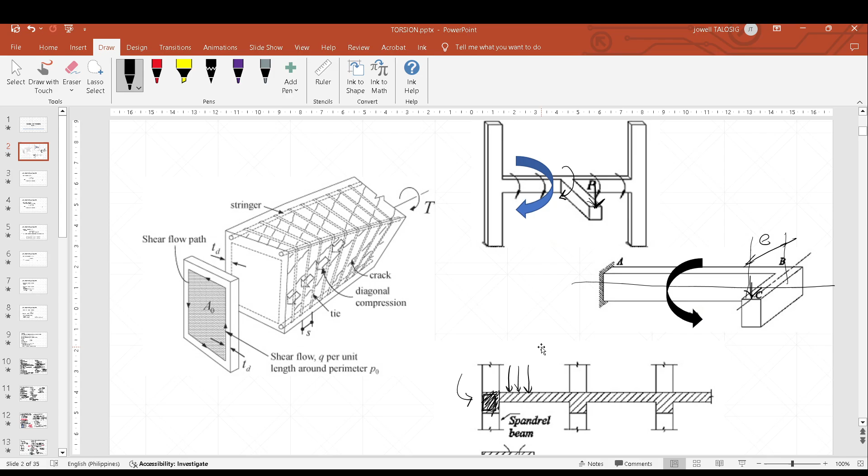Okay, and then meron din tayo dito, we have here this spandrel beam na nasa exterior side, nasa labas. Because of this position, nasa labas siya, then the load is in here, mga live load, dead load natin, nandito siya, applied on the slab. And if we're going to consider this beam, meron siyang load na nandito, which is eccentric to this beam, no? Yung exterior beam natin. Nagkakaroon po tayo ng moment pa rin, torsional, right?

So gaya ng sabi ko kanina, hindi sa lahat ng pagkakataon, not always merong torsional moment. Okay, not always. We need to check first if we need to design our beam to resist torsion. So paano ba tayo mag-design?

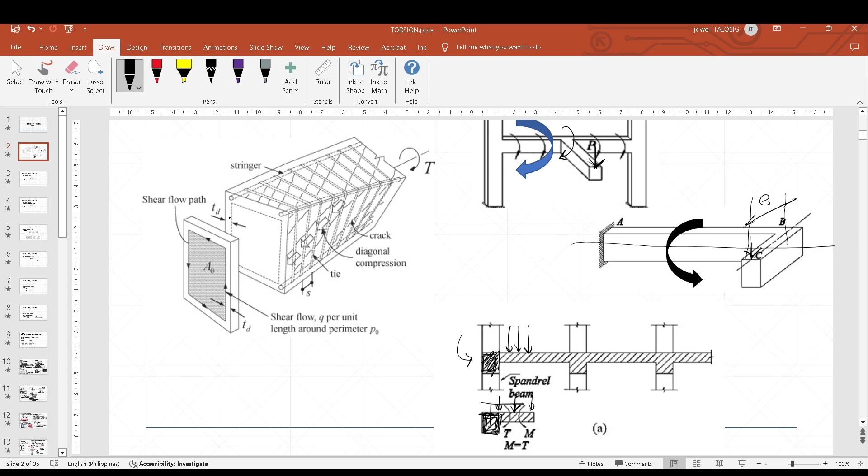So first we need to tackle the code requirements. Meron tayong dito ang tinatawag na cracking torsion. Which means, if your applied torsion, yung naka-apply mismo due to the loadings sa ating beam, sasabi dito na magka-crack yung ating concrete if the torsion on that beam is equal to this value here. So this is the cracking torsion, or T sub CR, that is equal to 1/3 lambda times square root of F prime C, quantity ACP squared, all over PCP. So this is the cracking torsion.

Ngayon, let's discuss what is ACP and PCP. Of course, lambda, alam natin na, that's the modification factor as discussed dun sa mga naunang topic natin. And then F prime C, of course, that is the compressive strength of our concrete. Then ACP is the area enclosed by the outside perimeter of the concrete cross section. So if we have here the beam, ACP is the whole area of our beam. That is the ACP. And PCP is the perimeter of your beam.

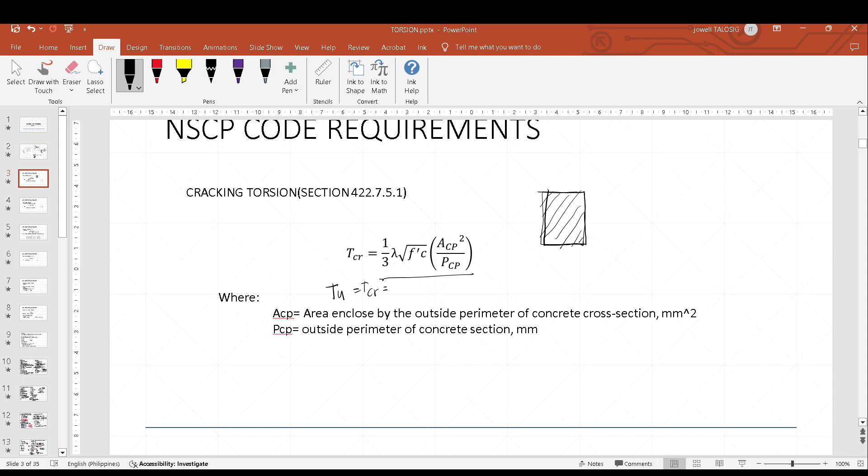Right? So ibig sabihin ba nun, pagka yung TU natin is equal to TCR, doon lang tayo mag-start ng design. Okay, so meron tayong tinatawag na torsional strength, yung threshold torsion. So torsional moments can be neglected if our applied moment, our TU, is less than our phi T sub TH, or the threshold torsion. So ang threshold torsion na to is basically ang 1/4 of our TCR times yung ating modification factor, or the phi.

Okay, so phi 1/4 TCR. Ito po yung ating threshold torsion.

Okay, so we have TTH, T sub TH is equal to 1 all over 12 lambda times square root of F prime C, the quantity ACP squared all over PCP. Okay, kung matatandaan nyo yung kanina, yung cracking, that's 1/3. Dito, 1/4 ng TCR, dun po siya nakuha.

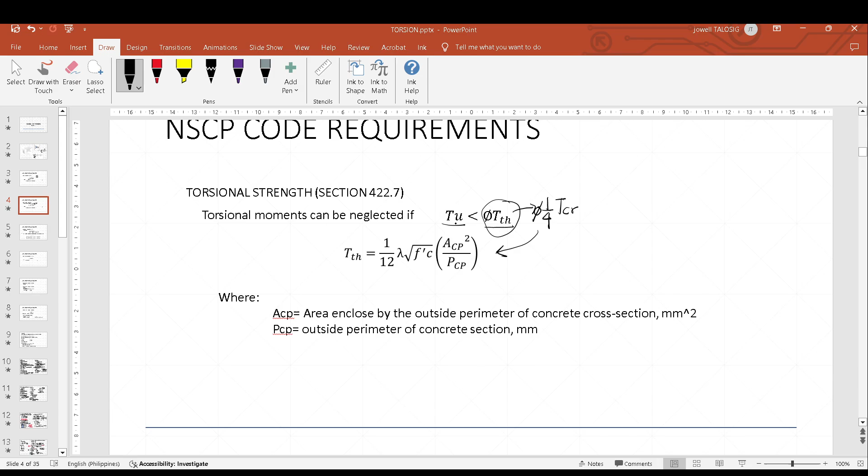Ibig sabihin, we need to design our beam for torsion when our TU is greater than or equal to 1/4 of our cracking torsion. Hindi po natin pinapaabot sa ating cracking torsion, no? Sabihin, 1/4 pa lang nun, kailangan mo nang i-design yung beam to resist torsion. So again, we need to design our beam to resist torsion when our TU, applied torsion, is greater than our phi threshold torsion, T sub TH.

Okay, so next is meron tayong tinatawag na cross-sectional limit, same dun sa ating shear. Meron tayong cross-sectional limit, so for us to check, no class, na that our beam size or dimension is adequate enough to hold or to resist our torsion, okay, we need to check, or we need to satisfy this equation.

Okay, here for solid section, sa ating NSCP, sa section 422.7.7, okay, meron din tayong for hollow section, but for this topic we mainly focus on the solid section. This is the equation we need to satisfy. If our left part of the equation is less than or equal to the right part, meaning our beam is adequate to be designed for torsion. Pag hindi po, pag greater yung left side sa ating right side, we need to increase our dimension.

Okay, so let's define, no, the equation. So we have here for the left portion, so you need to memorize this one, which is the square root of the quantity VU over BWD squared. This is basically because of our shear. So combine na to, combine to ng shear saka torsion.

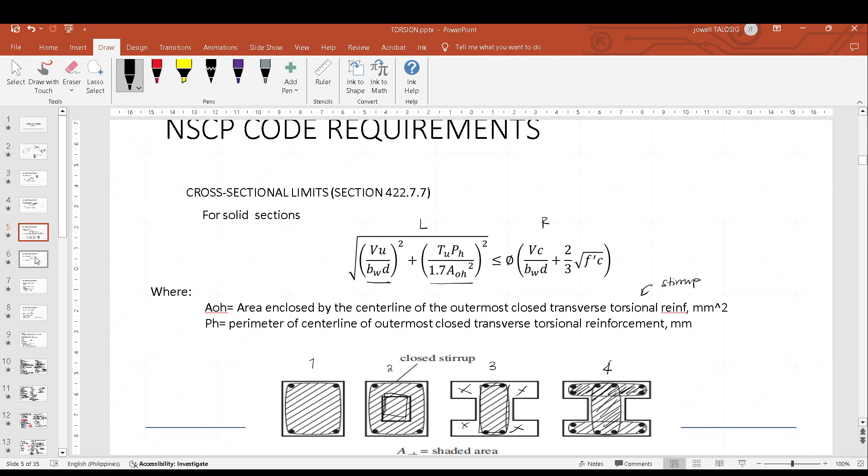Okay, so next is the nominal torsion moment. It's based on our section 422.7.5.1 ng NSCP. So we have here the formula Tn, the torsional moment, nominal torsional moment, which is equal to 2AO AT FYT all over S cotangent theta. So AO, it has a formula of 0.85 AOH.

Okay, so AO is 0.85 AOH. And AT here is the area of one leg of closed stirrup resisting torsion, basically it is the area of your stirrup. Yun yung ating AT, right? So that is for the nominal torsion moment. And of course, S here is the spacing of our stirrup.

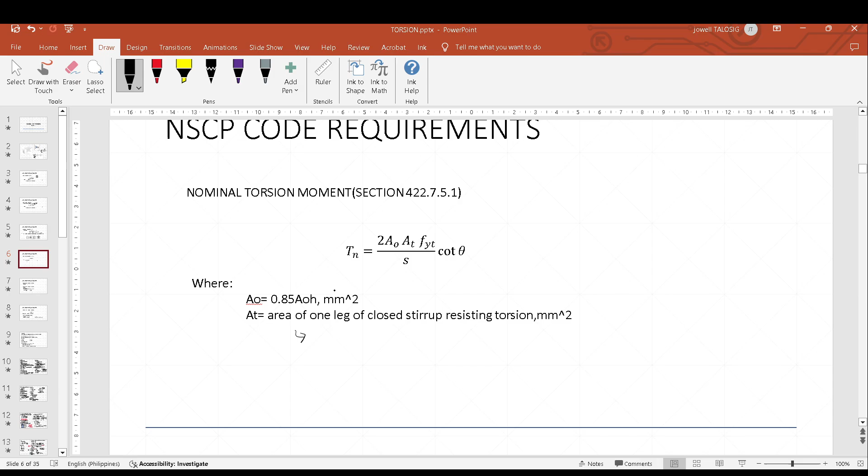Okay, so next is the maximum spacing of transverse reinforcement. Based on our NSCP Section 409.7.6.3.3, we have pH or the perimeter divided by 8, or 300 mm, whichever is the smaller value. That's our maximum spacing.

For the minimum spacing, the formula is AV over S, which is the area of the transverse reinforcement all over S. So we have 0.062 square root of F prime C, BW over FYT, where FYT is the yield strength of your transverse reinforcement. Or we have 0.35 BW all over FYT. Take note of these values, the maximum and minimum spacing of your transverse reinforcement.

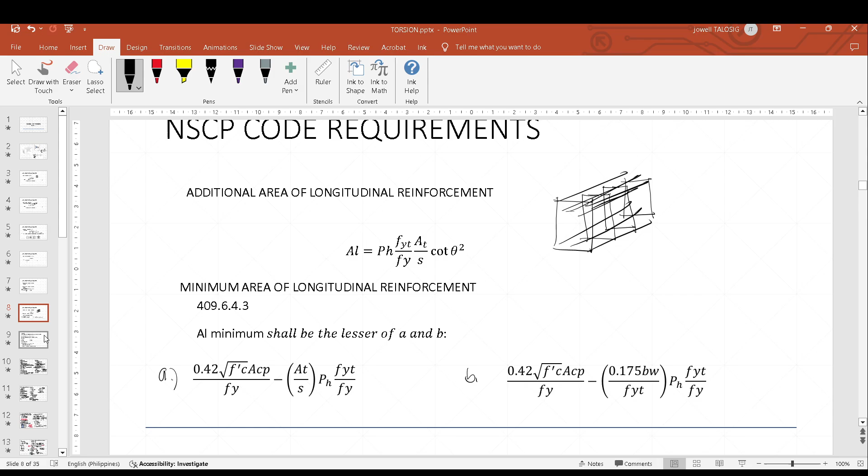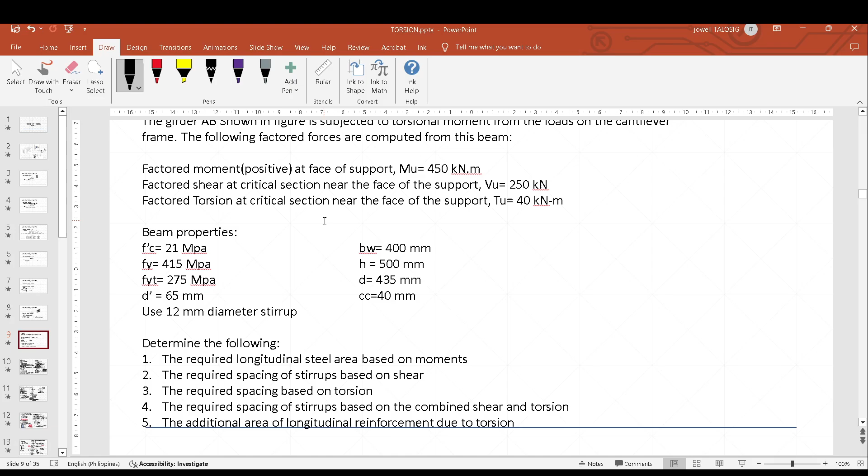So let's use the formulas discussed earlier in practice. Here's the example: The girder AB shown in the figure is subjected to torsional moment from the loads on the cantilever frame. The following factored forces are computed.

These are our given forces. We have the factored moment MU, 450 kilonewton meter. Factored shear at the critical section near the face of the support, VU, 250 kilonewton. And we have the factored torsion, TU, 40 kilonewton meter. All of these are given, already computed.

Then we need the beam properties. F prime C, which is equal to 21 megapascal. Fy, the yield strength of our longitudinal bar, the main bars of our beam, 415 megapascal. And Fyt, the yield strength of our transverse reinforcement, which is the stirrup, has a yield strength of 275 megapascal. And we have a D prime of 65 mm if our beam is doubly reinforced.

And then we need to use a 12 mm diameter for our stirrup. The width of our beam is equal to 400. Our height of the beam is 500, and the effective depth is 435. And then we have a concrete cover of 40 mm.

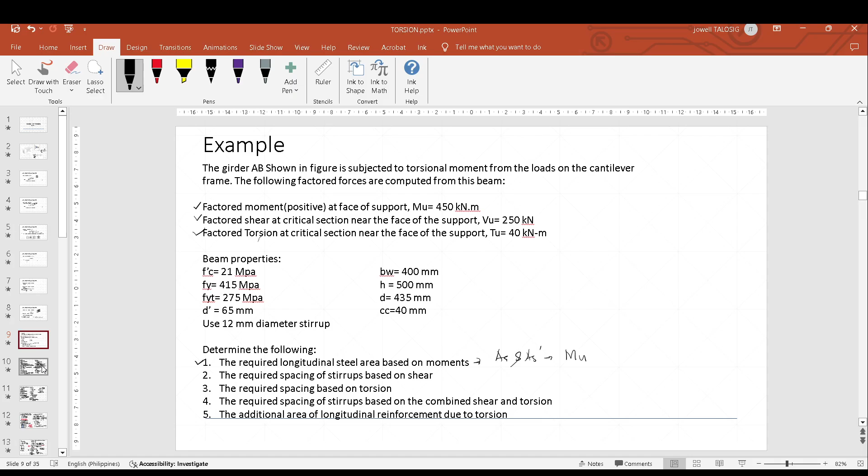So based on shear. We have our VU given at 250 kN. So the first step is we need to solve VC.

VC is equal to 1 over 6 lambda square root of f prime c, BW, D. So 1, 6, lambda is 1, square root of 21, quantity 400 as your BW value, times D, 435, and of course divided by 1,000.

To convert your answer into kilonewton, so we have VC is equal to 132.89 kilonewton, and our phi VC, our factor is 0.75, quantity 132.89, giving us 99.67 as our phi VC.

Next is check for cross-section limit. So check natin if adequate yung beam cross-section natin to resist the shear. So we must satisfy this equation here.

Our VU must be less than phi quantity VC plus 2/3 square root of f prime c, BW, D. So we have here 0.75 as our phi, quantity 132.89 plus 2/3 times square root of f prime c, which is 21, square root of 21, BW is 400 times D, 435, and divide it by 1000 to convert it into kilonewton.

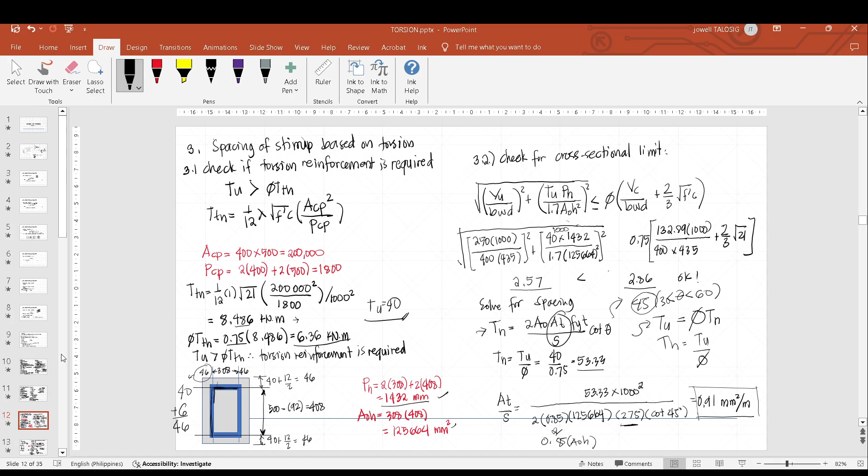Okay, take note, hindi to spacing, value ng At all over S. So next, pwede natin solve yung spacing. So to solve the spacing, At over S is 0.91. So for At, yan yung area ng transverse reinforcement natin, isang leg lang. So we have S is equal to At all over 0.91, which is At, area of transverse reinforcement, pi all over 4 times 12 squared, all over 0.91.

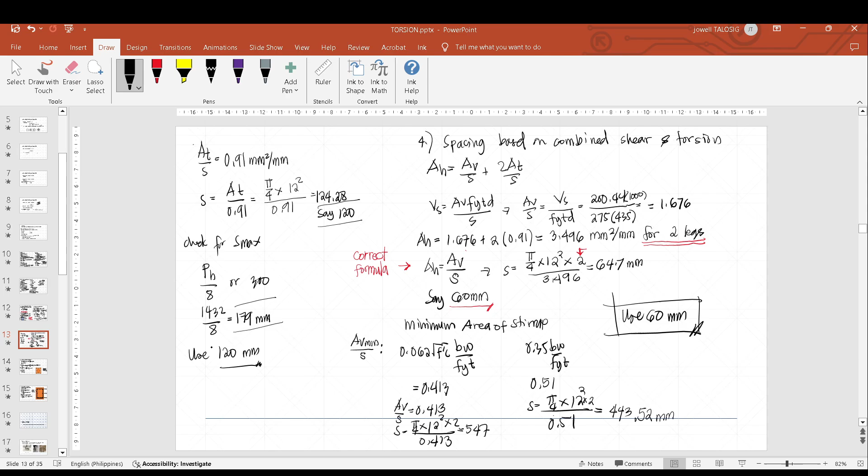So we have 124.28, or say 120 spacing. So check for S maximum. Pasok ba itong 120 sa ating maximum spacing for torsional reinforcement? So we have pH all over 8, or 300, whichever is the least value. Yun yung ating maximum. So we have 1432, our pH divided by 8, we have 179. So ang least dito, ang ating S max will be 179, compared to our computed spacing which is 120. So we're going to use 120 because it's less than our maximum.

Okay, so this is the spacing based only on the torsion. Ngayon, siyempre the design natin in actual, so i-combine natin sila, yung ating spacing ng ating stirrup based on the shear plus yung ating torsion. So we have here the equation, the formula here.

AH is equal to AV over S plus 2 AT over S. So ito yung sa shear, ito naman yung sa torsion. As you can see, merong 2 na nakalagay. Bakit may 2? Kasi yung At all over S natin is only for one leg. Okay, but this is combined. Combined kasi ito, yung AV kasi natin is dalawang legs niya. So dito, kailangan natin ipantay dun sa ating torsion reinforcement, so times 2. Right? So dito, our VS here class—

Okay, this is based dun sa ating formula sa ating shear. So VS is equal to AV FYTD all over S. So gusto natin kunin yung AV all over S. So AV all over S is equal to VS all over FYTD.

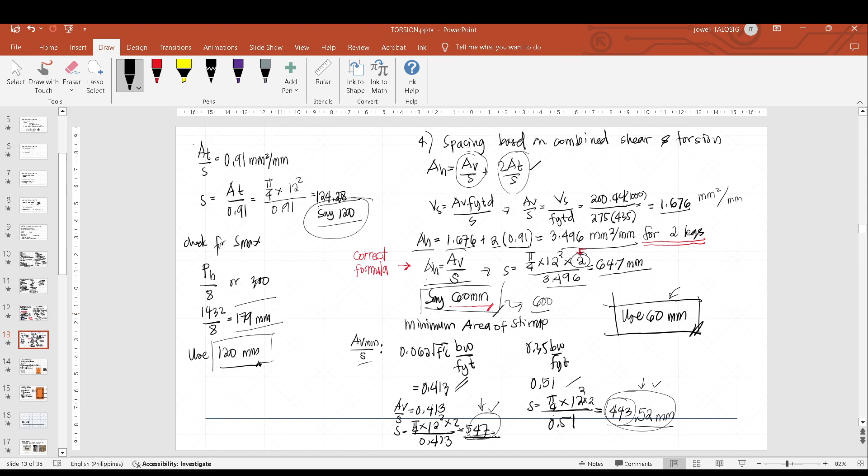Next, is there additional longitudinal reinforcement? Yes, there is. Given this formula, AL, longitudinal reinforcement due to torsion, we have PH which is 1432, already computed. FYT is 275 divided by FY 415, times At over S, which we already computed earlier. We need this term, At over S, which is 0.91 times cotangent squared theta.

So our theta is 45. So for AL, we have 863.51 millimeter square. And then we need to check for the minimum AL.

This is our formula in the NSCP. All these terms, we've already solved. Just input the terms. For our formula letter A, we have 64.04 millimeter square. And for our B, we have 686.01 millimeter square. This is the minimum.

As you can see, our AL here is greater than the minimum AL, so we're going to use 863.51. We'll use AL 863.51 and then use 12mm diameter bar as our longitudinal reinforcement.